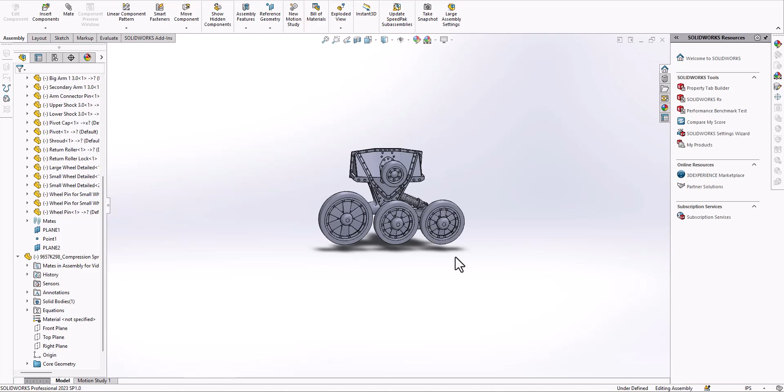Hey guys, in this video I'm going to be talking about the suspension system I did for my 1/16 scale Valentine. I posted a short showing the assembly of this unit. Now I'm going to talk about how it works, why I did things the way I did, and show the evolution of some parts and why I evolved them that way. I'd print it, test it, something would break, I'd fix it, figure out why it broke, print it again, break some other way, and repeat until now I have what I think is a good design that can take quite a bit of load, doesn't break, and looks good.

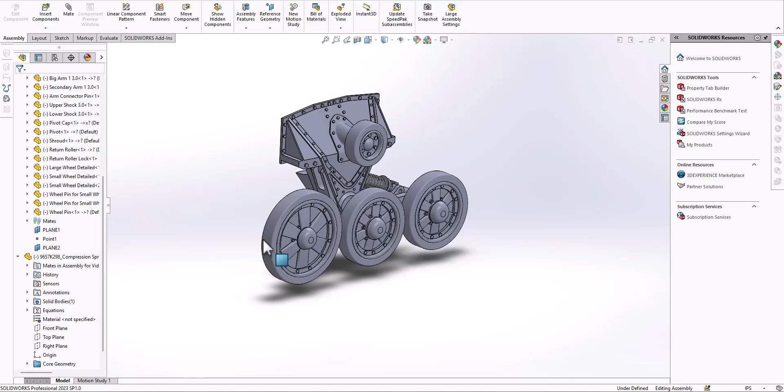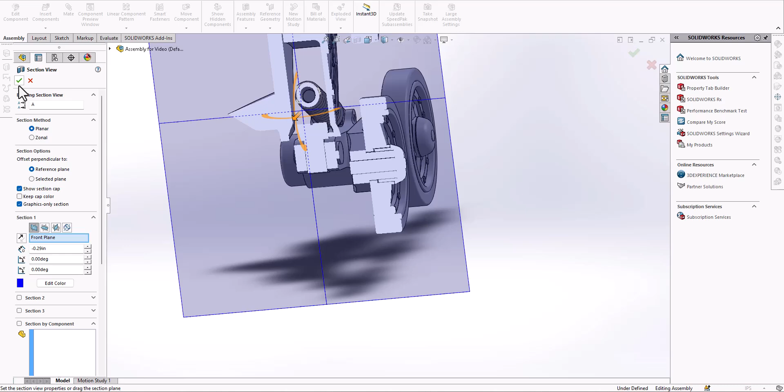The way this works is, first off, I'm going to hide these wheels so I can show how they work. The wheels are two pieces. There's a cap that penetrates all the way through the suspension arm and friction fits in there, even though it doesn't look like it does because of tolerances. Connected to that, here's a cutaway - it's the same for all the wheels. There's some give, so the wheel spins very freely and just gets locked in. It can't really wobble too much and spins well. It's really easy to pop off, but it doesn't come off on its own, which is really nice. Once the tracks are on, they should help stabilize it so it won't shimmy out. That's how those wheels work.

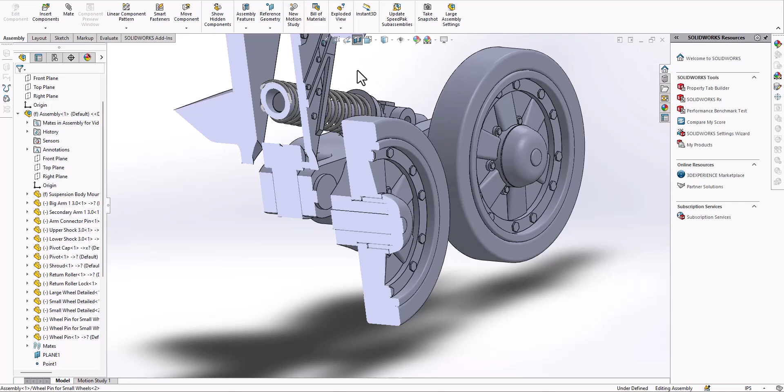I'm just going to talk about that real quick so I can hide them and talk about the actual mechanism. The way this works is there's three wheels on this bogie. You've got this main arm - I'll hide this too so you can see - and this. So many things to hide. You've got this main arm, so this is naturally going to pivot up and down.

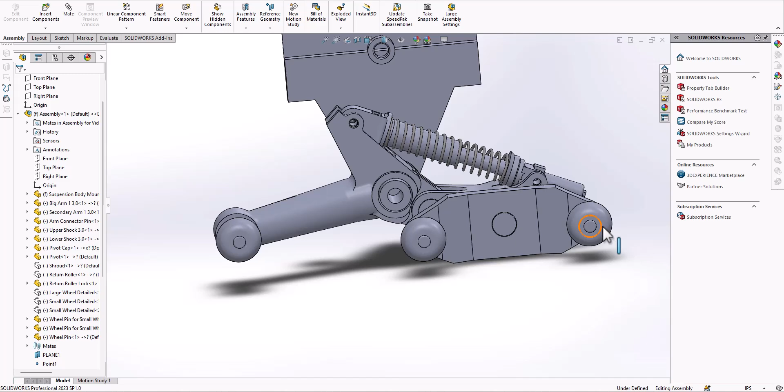What happens is you can essentially think of this - if these two wheels are on the ground, it's held here, so this is going to pivot up and down, and the spring is going to compress. That's going to give this wheel some stiffness so it doesn't want to recoil as much. The opposite is also true: if this wheel's held steady and one or both of these wheels are pressured, they're going to want to move up, and the spring's going to want to compress.

What happens is that's actually this piece moving up. This block here wants to move down at this pivot point, and then these two wheels just pivot around this point. When you press it down, the two wheels are going to want to stabilize with respect to this point, and then that point is stabilized with respect to the spring on this arm. So it keeps the entire system contained, and this whole assembly just pivots.

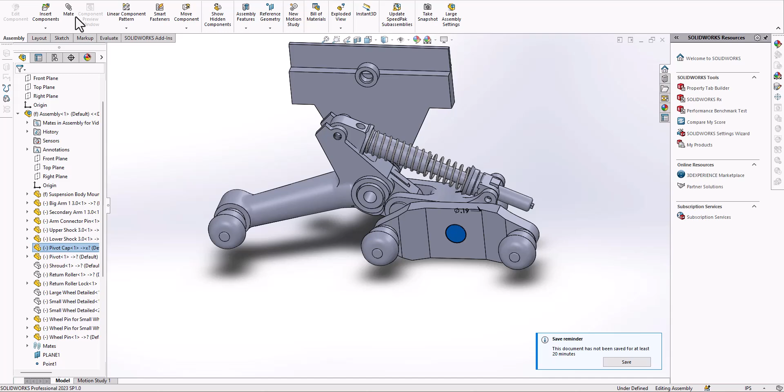My recording software is in the way. It just won't let me.

No, it's all fixed. But anyway, it just pivots around this axis, and that's how you get the full range of motion with the suspension arm.

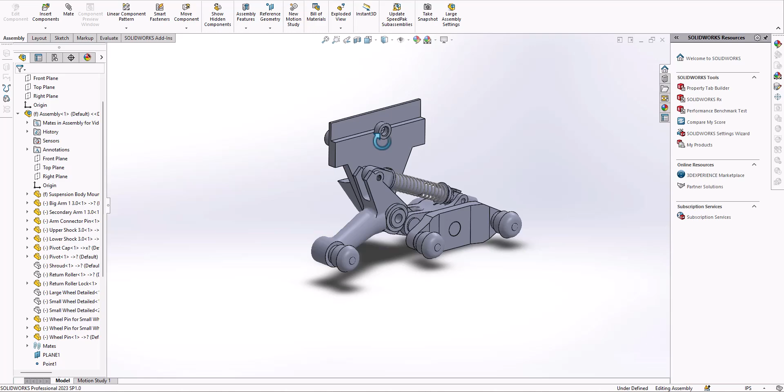Now I'm going to go into each part in a separate clip because it's going to take a second to get all the parts together, and I'll talk about each piece and how I've iterated it. I'm going to start with the shroud and the mount point for the body, since that's the most significant, because this is actually an older design. This is not part of it - you can see there's no clutch up here, it's just kind of a block. I fixed that because it was an issue. I'll talk about all that here in a second.

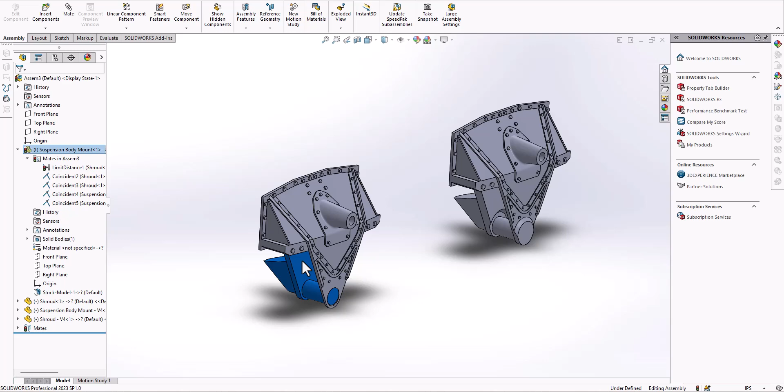For the first component I'm going to go into detail on, I have the body mount, which is this piece, and what I call the shroud, which is this piece. I overwrote all the intermediates, but this is the final design I'm on, and this was the initial design. For the initial design, they look similar - you can see there's little pins that run through. I'll talk about that, but this design was terrible.

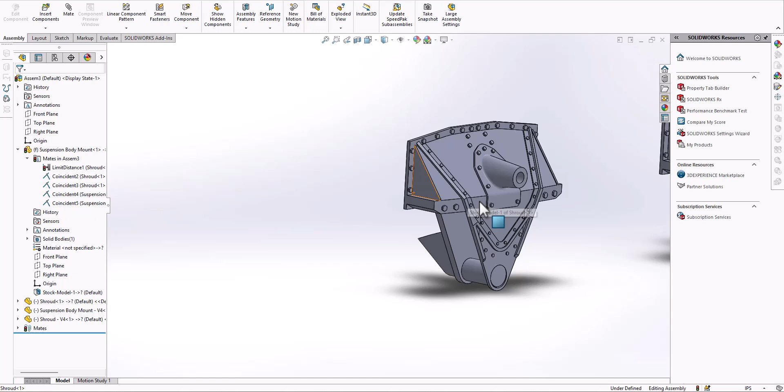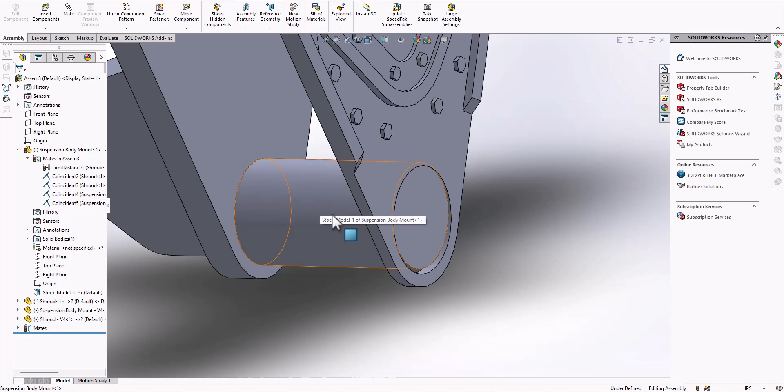First off, you've got load being applied to this axle, so it wants to go up. I don't have it fastened right here - it just kind of fits inside this really narrow little bar, and it breaks. This loads, and this just pops off. And then when that happens, you've got now a moment being applied that's trying to rip this out.

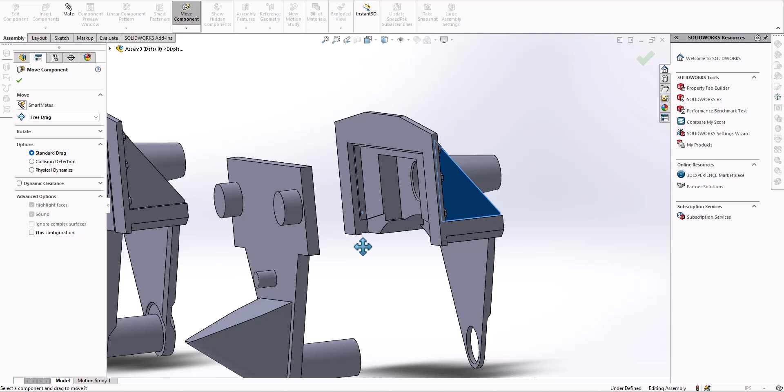And there's this little block that's supposed to slot into this block and be glued in. That's all well and good, except you're putting an immense amount of shear onto that glue, and it just fails and falls apart. So, not great.

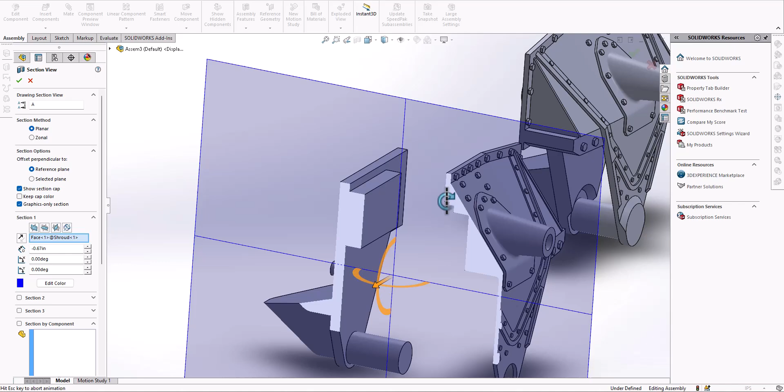So the first change I made, well actually there was another issue. If I run over here, this looks fine until right there. That is incredibly thin, so thin that it's basically transparent in resin, and it looks terrible. And it's going to be a failure point, right? That's where it splits. This piece just splits there, and then it creates a crack that propagates through and destroys the piece. So slightly not good.

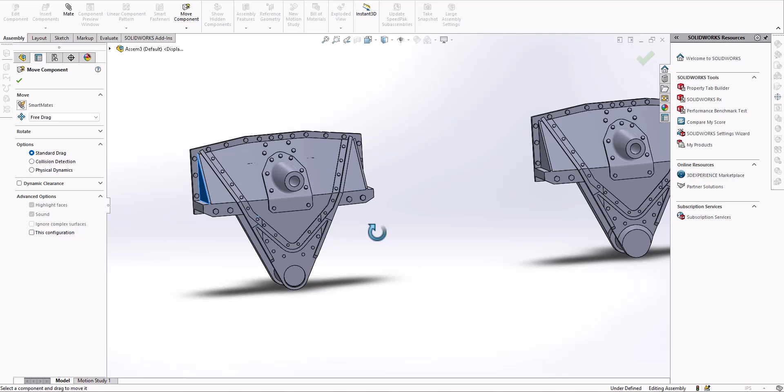So yeah, this design is kind of just awful. It looks fine, and aesthetically I was happy with it, but that was kind of the only thing it had going for it. Everything else was just stupid.

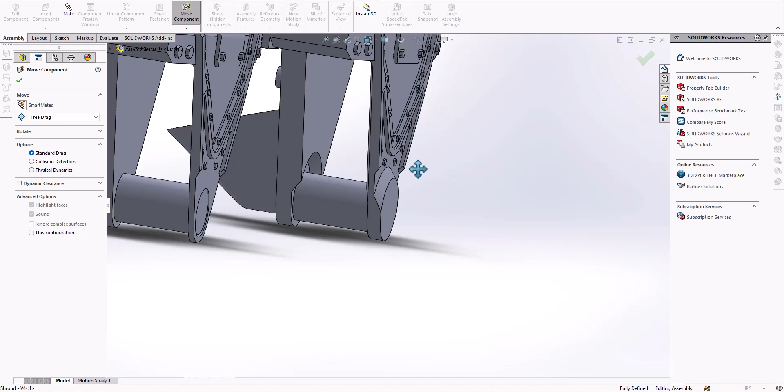So this piece has a few modifications, I'll talk about all of them. I'm going to fix this piece real quick so it doesn't slide away on me. This looks very similar, but you can see it's thicker down here, and in fact thicker everywhere, because that was another issue - this piece would crack and just split right here. You have a stress concentration right here, and it just breaks the piece when it's being loaded, which isn't good.

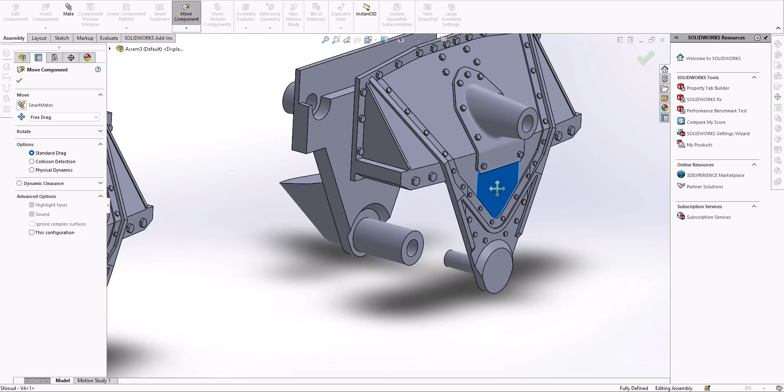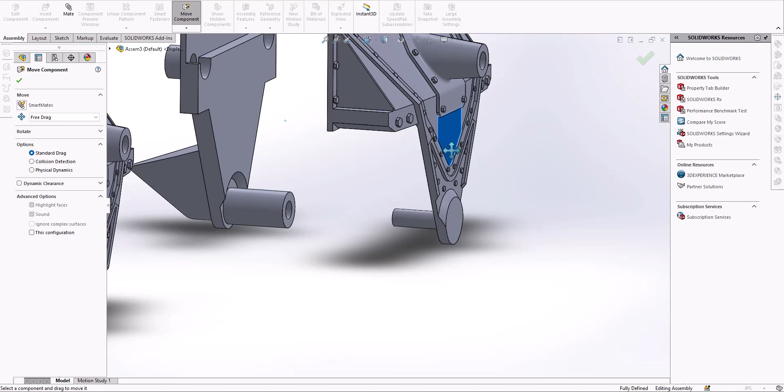So the first change I made, other than thickening that, is I added this pin through here that attaches to this piece, and added a little bit of support here so it's not too thin. What this does is, instead of the load being applied and creating a moment right here, now it's a load applied here that distributes the load so it's going vertically up this shroud piece and this inner piece, which turns it into a compression load versus a strong moment, like a strong torque being applied at this interface.

So that solved those issues. This being thicker solved those issues.

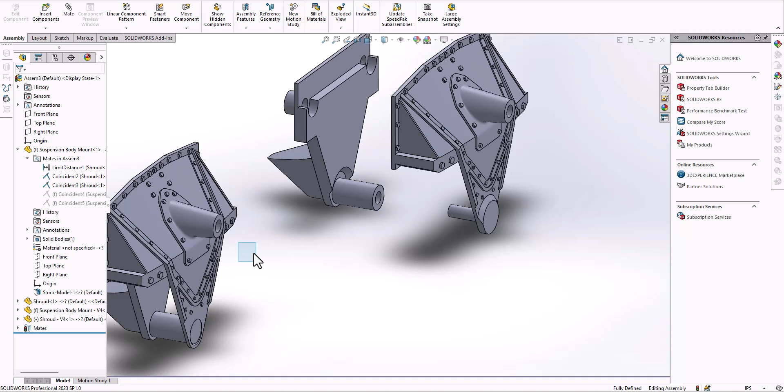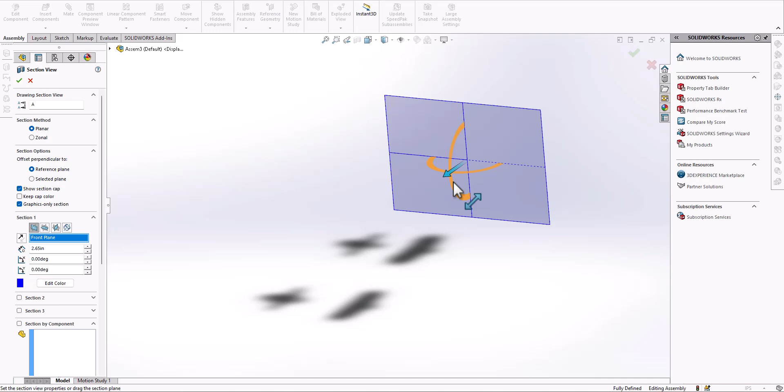Another thing I did is, you can see that block's gone, it doesn't extend so far. You can see this piece doesn't actually extend as far as this piece, and also it cuts off earlier, it doesn't go as high. Which means that on this piece, if I go back to the section view - I'm on the wrong plane - there we go, you can see it doesn't get nearly as thin, which is probably good. So that solves that issue.

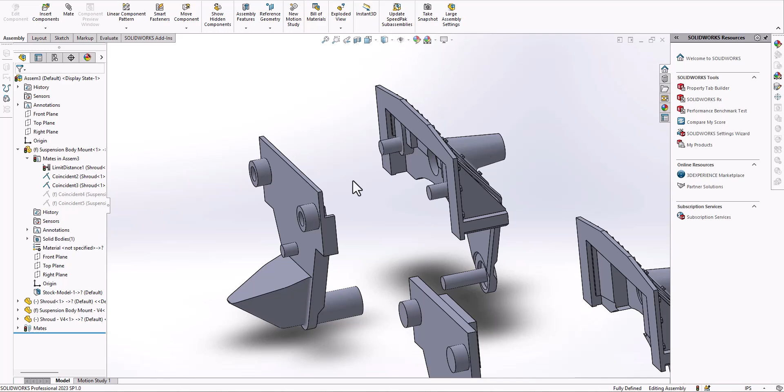And then originally I didn't have these pegs here that slotted into these holes. What happened is it fits great - this lower part goes in, good. This part, with the way the printer works, sometimes has some dimensional inaccuracy for parts like this. And what would happen is this would kind of bow outward, and you'd end up having this piece not wanting to mesh well, so this plane would not mesh with this plane, but would actually bow out, which doesn't look great.

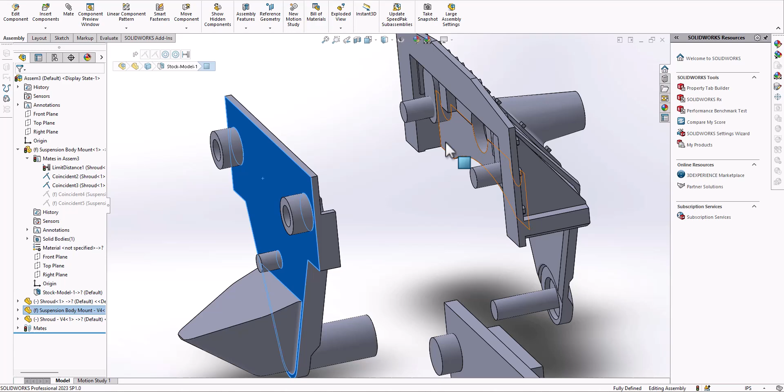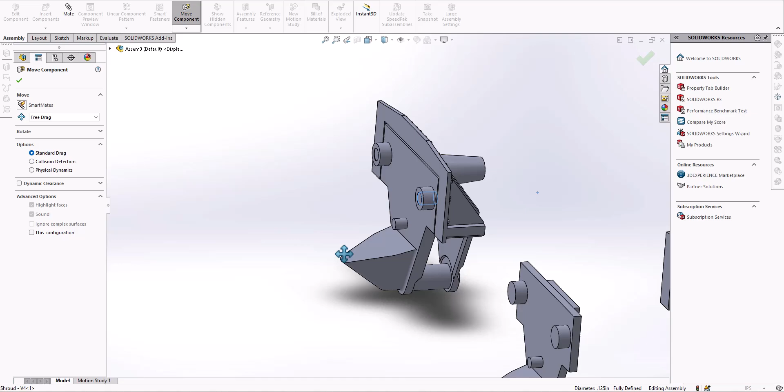And also now you've basically got it twisting around down here, so you have glue up here but it's being pulled. So what these pegs do is create a kind of secondary lock where they have the friction fit, and in order to bend, it has to actually shear off the pins, which it's not going to do realistically. So that holds it together, doesn't split, doesn't do anything weird, and that's where I'm at now. It's stood up to all the testing, although my testing admittedly is just holding it and pushing it into the table with the wheels on, checking that the suspension actuates and this piece doesn't break. But it doesn't break, so, you know, testing is testing.

So that's the design of this piece through the iterations.

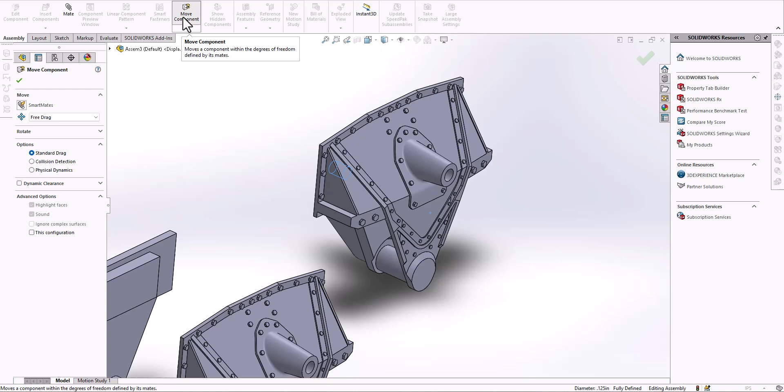Now I'll get to the next piece, which I call big arm, which I'll show you in a second. Okay, so now for big arm, quote unquote. This is the piece that the large wheel attaches to right here, and the small pivot point for the smaller wheels. There's an arm that comes off here where the spring is mounted, and then there's that pivot for the wheels. In fact, do I have the assembly? No, I don't.

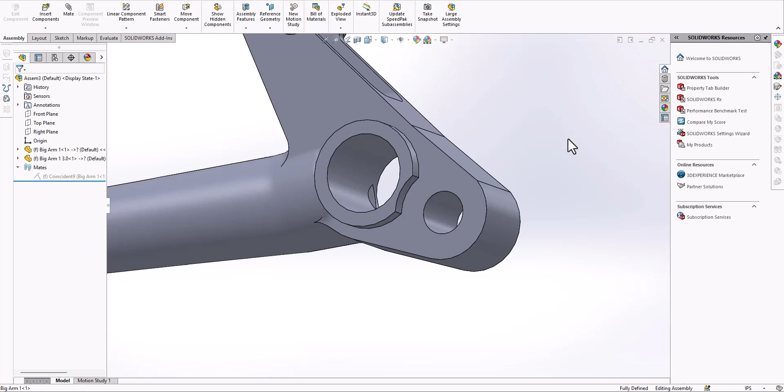Anyways, so a few modifications. Here, there's a little slot in this wheel, or in this circle, to allow the second arm to attach and swing around. So there's that.

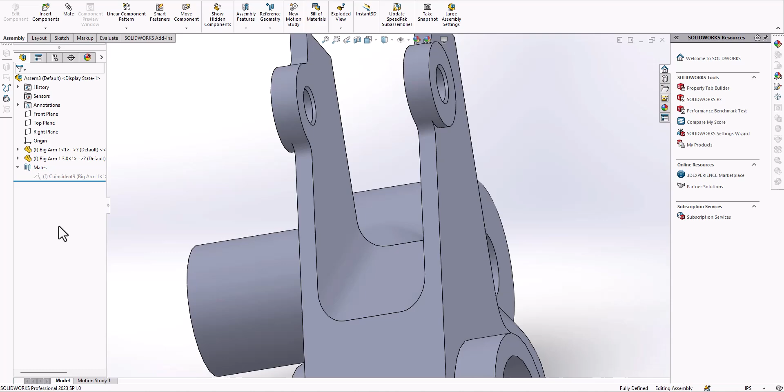These walls are narrow, and then the pins flare out, which didn't make much sense, so I ended up thickening that and just having it be the full thickness, because what happens is when you try pushing a pin through, if it's not perfectly aligned, you're pressing it against here and it just snaps, which isn't good.

This piece got modified to a different compatibility with the caps, so this in the back here and this in the front here look different. I added this taper so it's easier to get the pin in, because you have a little bit of guidance rather than having to get it perfect.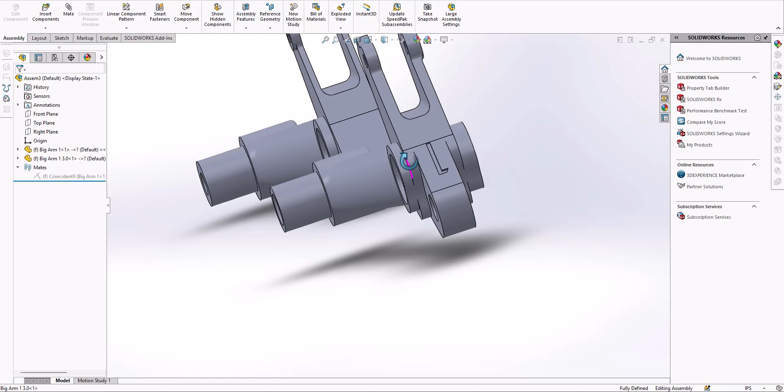And then here I widened, or actually, no. So this arm piece got narrower than this piece, because that way the other piece could get thicker, and the other piece was pretty narrow, and I'll show that in a second, and it would snap. So I did that, and then I

gave it more of a cutout so that there's more room for the piece to actuate without ending up kind of gripping on this edge right here. So that's pretty much what I did here.

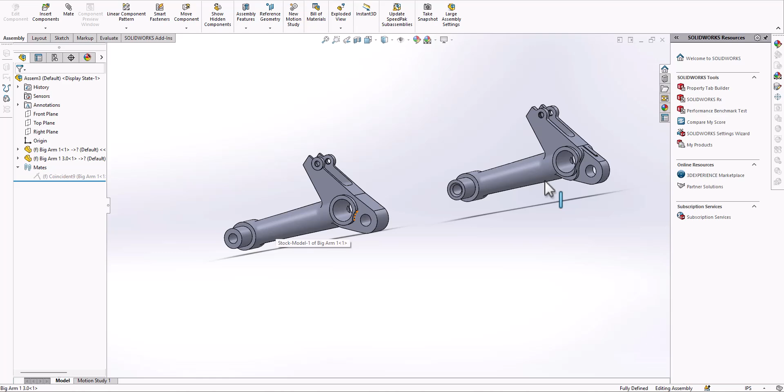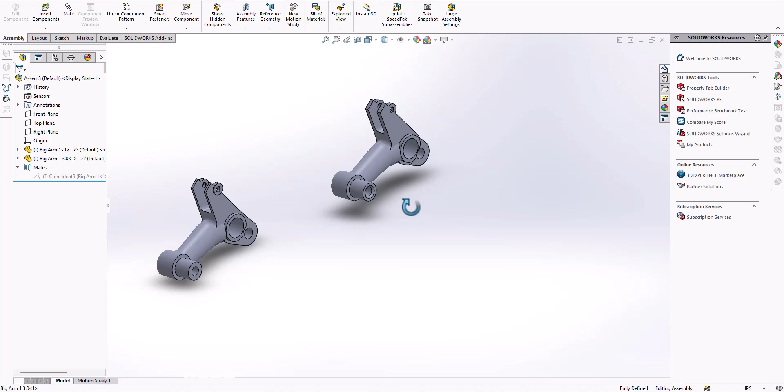This one just represents the type of suspension. So that just means that, because on the opposite side, there's going to be a mirrored version of this. So it's just so you can identify 1 versus 2. So this is the front left and back right, and the other one's the front right and back left for the suspension bogies. So that's basically all the evolution this piece went through.

Okay, so now the next piece. This is the piece that attached. So this is where the large arm connected, where I showed just previously.

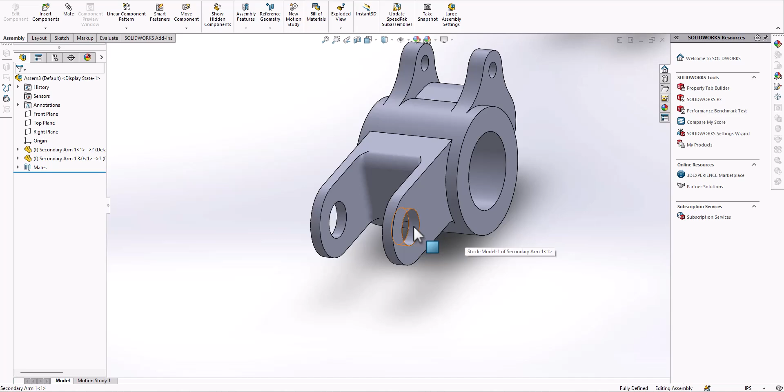So in this original version, the larger arm had a thicker block, and that made these pieces really thin because they have to be this is the outer diameter limit for it to function with the bogie here, or the pivot point here, and the wheel pins going through. And there's a pin that attaches here that extends a little bit, so in order for it to fit, this is the widest it can be.

And what happens is this creates some twist where the wheels kind of do this motion. Hopefully my mouse shows. Like they go like that. So this piece twists, and that puts a lot of stress on these little arms, and they end up snapping, and then the piece just falls off.

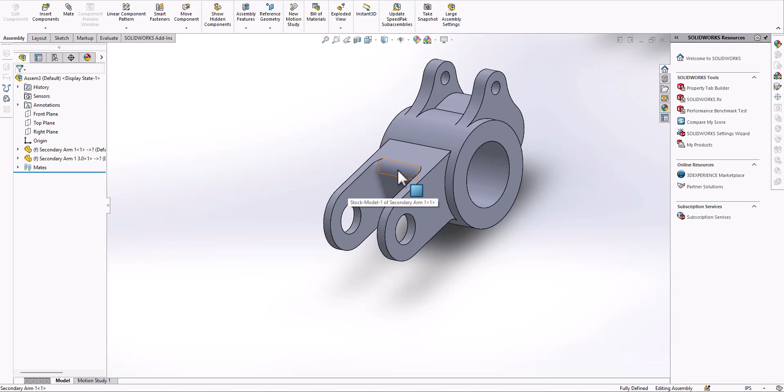So I fixed that. I also thickened up these pieces where the spring like actuator mounts, just to prevent any issues. Again, it has the 1.

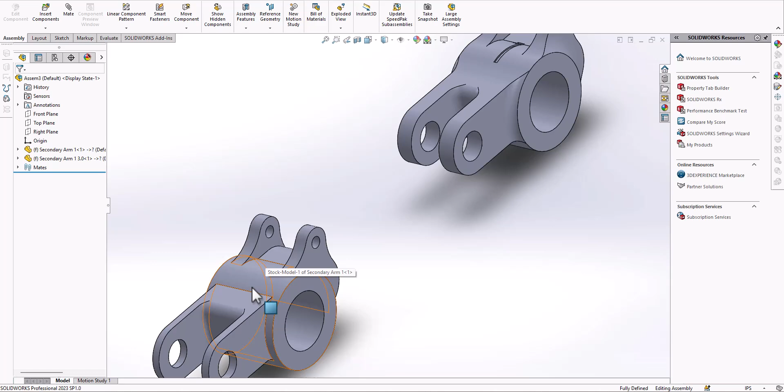And then I did some fillets because I'm 3D printing, so there's not really a manufacturing downside to it. And what it allows is it just makes it look a little nicer, it's a little cleaner, and it does add some material, so it reduces the likelihood of any issues.

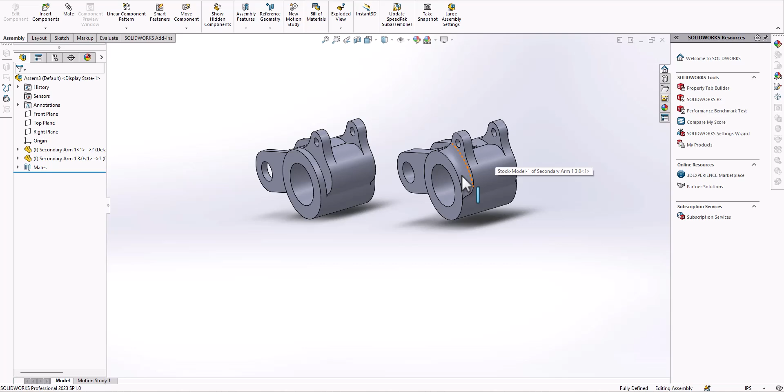So like here, it thickens this piece here, so it slightly reduces the moment that's being applied, so it makes it less likely that this little arm snaps. And that's basically all the changes that went on here, just thickening it up and stuff.

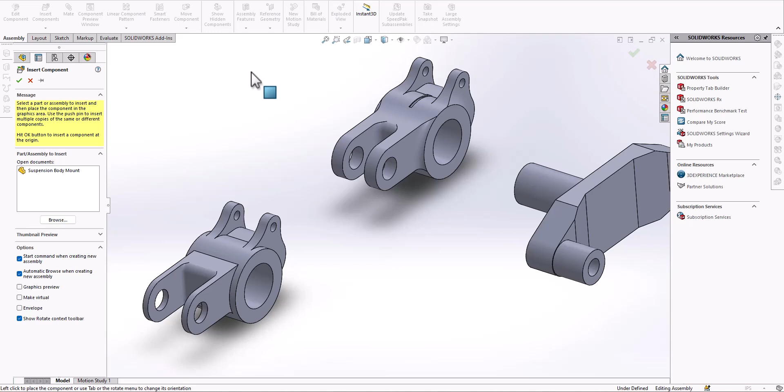Not too bad. And I forgot to show in the initial part, there's not really an evaluation of the pivot point or anything, so I'm just going to insert it and show how that fits. So I'm going to grab the pivot, hopefully. So this piece, it slots in. Actually, there was a slight evolution, but I don't want to go into too much depth.

But basically, I added the same solution as earlier, where there's a hole in here, and then there's a cap, which I'll grab. This cap now has a peg on it that slots through the hole. What I can do, it's not too much effort, so I'll do it.

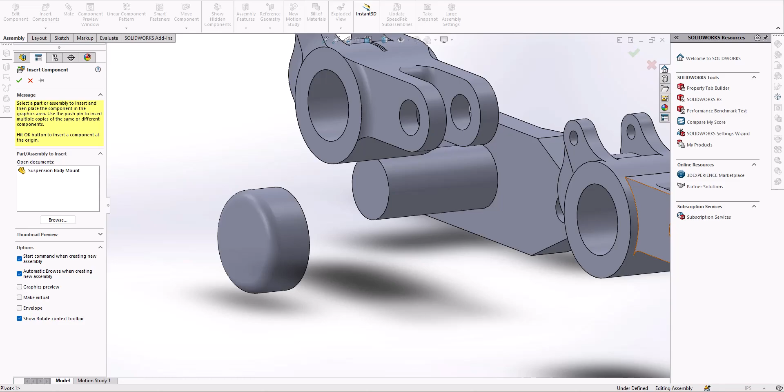Alright, so those were the main parts that actually changed much. Felt like I did more, but not really.

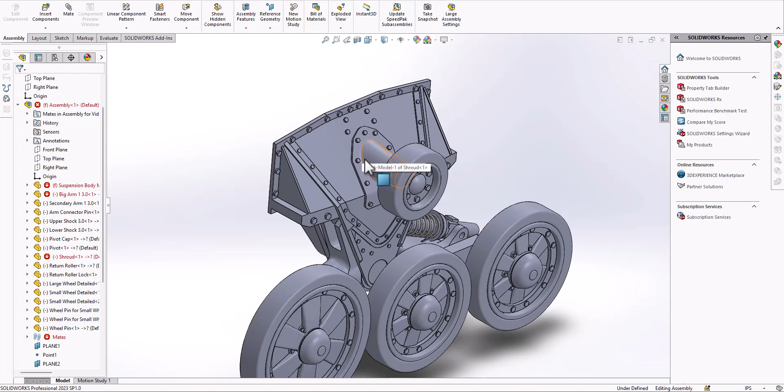So yeah, this return roller has a little cap on the inside that it locks into. The wheels I showed, this pivot, you can see how it just goes through and kind of creates a seal where there's a little bit of give in reality, just because the cap doesn't fit on perfectly, so that this can rotate pretty freely. And yeah, and then that's pretty much how this works.